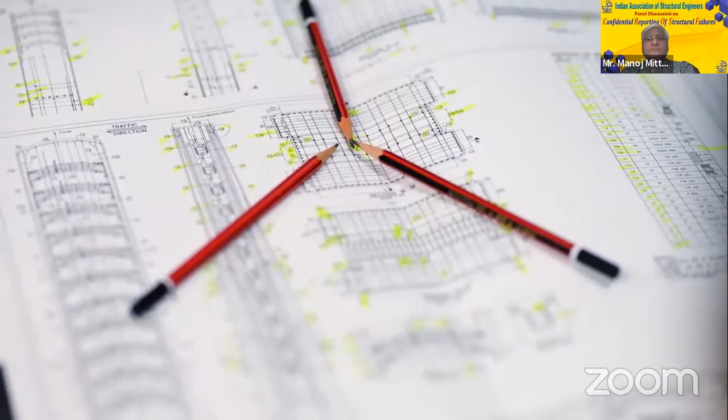The Indian Association of Structural Engineers, also known as IAStructE, was conceptualized and constituted in the year 2002 by a group of senior professional structural engineers from all over the country. IAStructE is registered under the Societies Registration Act 21 of 1860.

IAStructE is a national apex body of structural engineers in India with a mission to promote the structural engineering profession and cater to the professional needs of the structural fraternity.

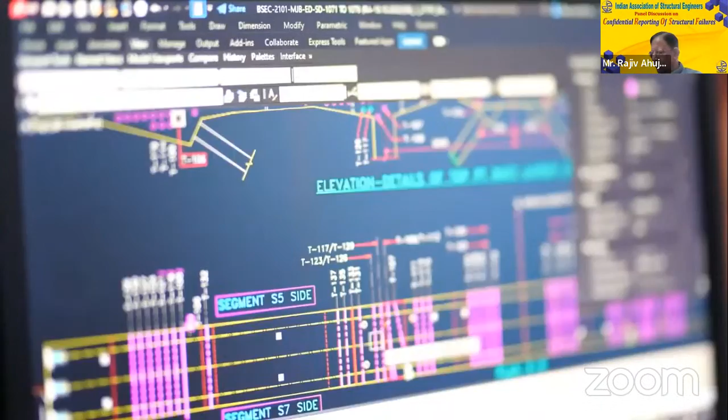In the short span of two decades, the association has attained an eminent position in the professional field. Its membership is valued very highly in the profession.

Since inception, IAStructE has been led by eminent structural engineers like late Shri Mahendra Raj, late Shri Shri Kumar Ghosh, Shri Subhash Chand Mehrotra, Professor Mahesh Tandon, Shri Alok Bhowmick, Shri Manoj Mittal and Professor R. Pradeep Kumar as its president.

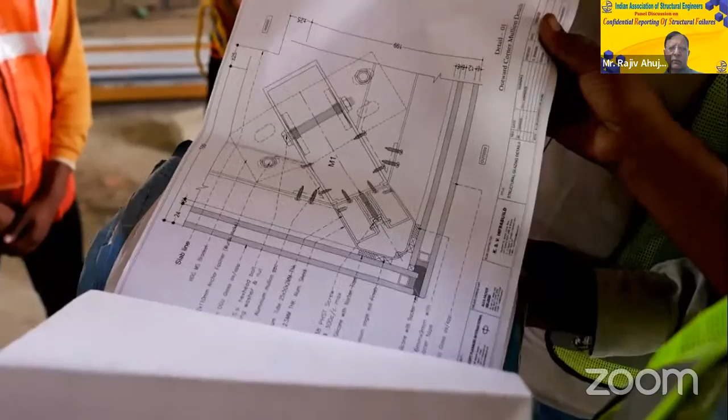IAStructE is a permanent member of the Engineering Council of India and interacts with the government on professional and policy matters related to civil and structural engineers. To expand its reach, IAStructE has collaborations with various international professional like-minded associations and institutions.

IAStructE's prime objective is supporting and protecting the profession of structural engineering by upholding professional standards and acting as a mouthpiece for structural engineers in India.

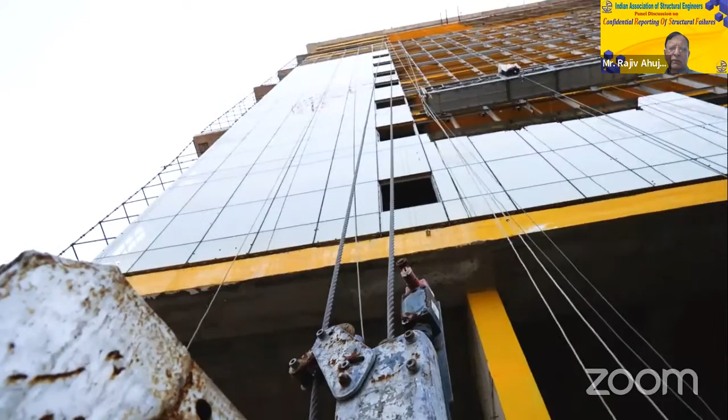IAStructE endeavors to ensure that its members develop the necessary skills in structural engineering and work to the highest standards by maintaining a commitment to professional ethics and standards.

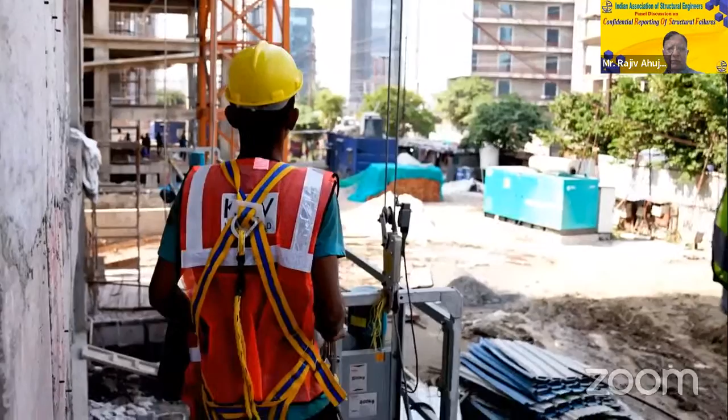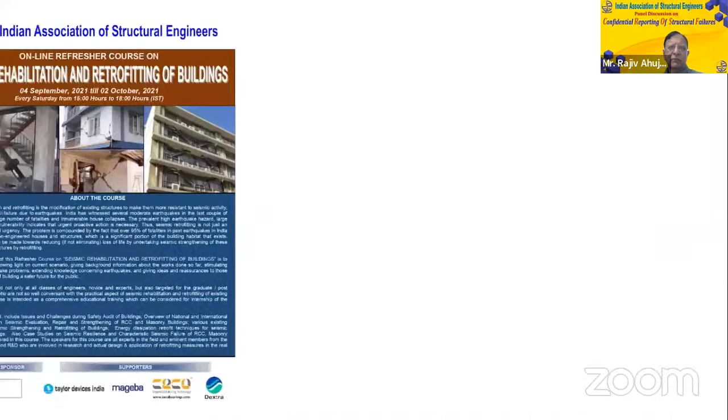IAStructE is actively engaged in organizing several continuing professional development (CPD) courses for structural engineers to help them update their knowledge and advance their career paths. It also conducts refresher courses for young and practicing engineers and student-oriented programs.

Seminars, workshops, conferences, technical lectures and discussions related to the latest technological advancements and case studies are also organized regularly for members to enable them to continuously update their knowledge and skill set by interacting with the best minds from the industry. IAStructE's activities are widely appreciated and known for quality technical content.

IAStructE is also actively engaged in publishing its quarterly journal Structural Engineering Digest (SED), code commentaries, professional guidelines, and a monthly newsletter. IAStructE's publications are becoming popular with time.

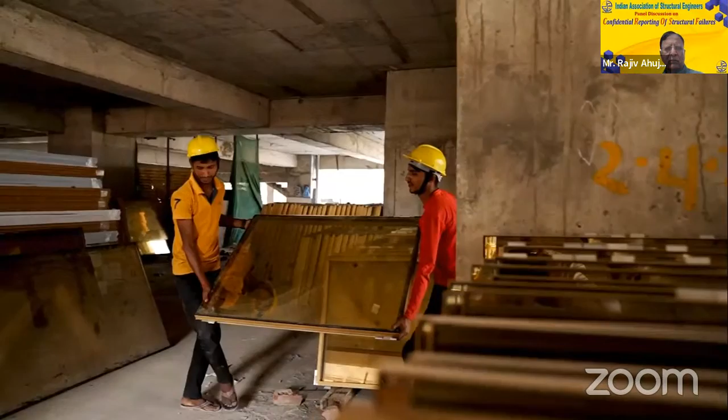IAStructE has representation in various technical committees of BIS and IRC as well. Its members are actively contributing to National Code Formulations.

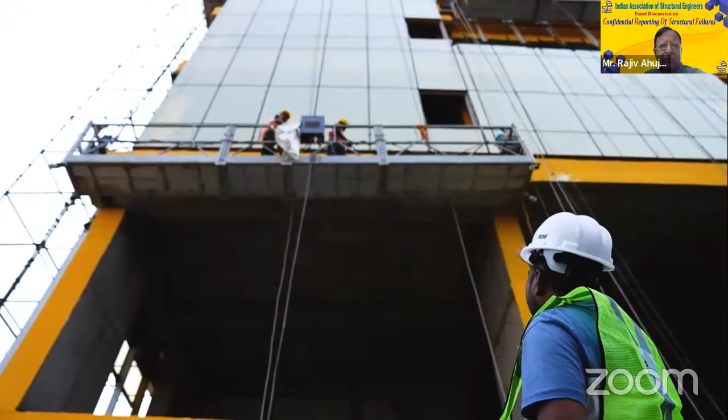In the year 2020, IAStructE started a National Awards competition to stimulate interest in the structural engineering field and to promote innovative thinking and creativity. The awards are presented to winners in recognition of their outstanding contribution to structural engineering, in categories which include Outstanding Structure, Outstanding Structural Engineer, Outstanding Woman Structural Engineer, Promising Young Structural Engineer, and Best Master's Thesis in Structural Engineering.

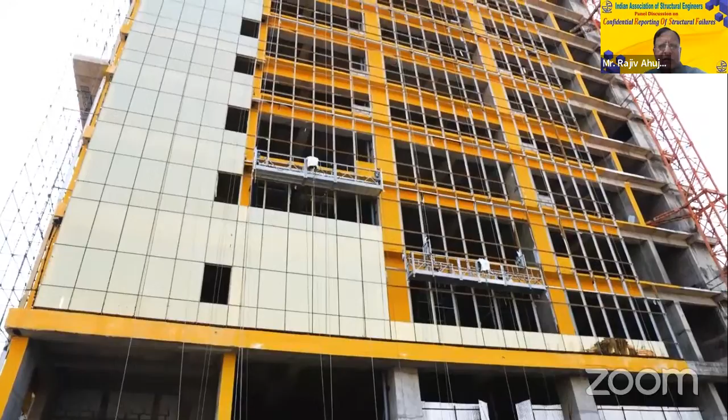IAStructE is currently operating from four regional centers, namely Eastern, Western, Northern, and Southern, having its headquarters in Delhi, to inculcate professional culture and provide handholding to budding engineers.

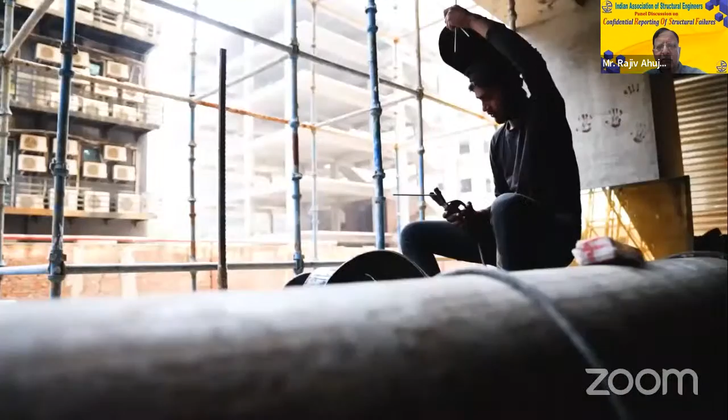IAStructE has its student chapters in several leading engineering institutions as well. Membership of IAStructE is open to all civil and structural engineers engaged in the structural engineering profession.

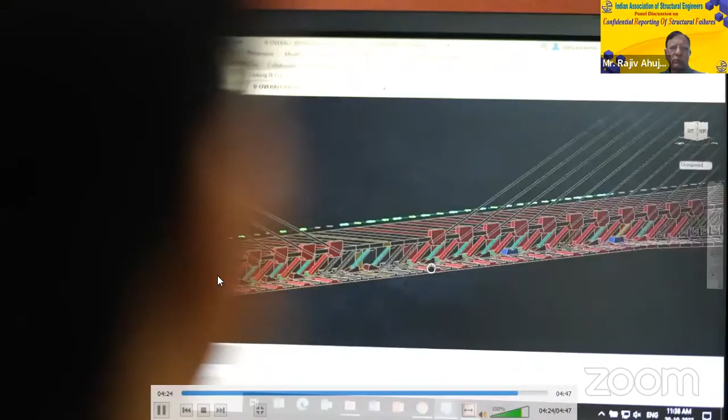Members are elected based on their qualifications and experience in different grades as per eligibility requirements prescribed in the bylaws. Each application is carefully scrutinized before approval.

More information about IAStructE is available on its website, www.iastructe.co.in.

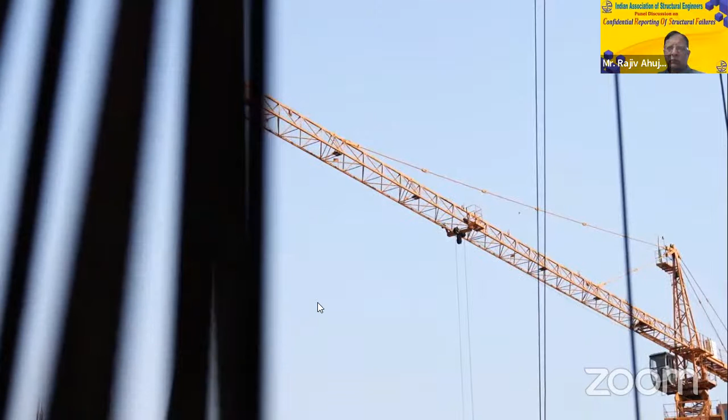Should we start now? Yes. Good morning.

Welcome to this very important webinar on confidential reporting of structural failures, which is a newsletter started by IAStructE some time back.

And the aim today is to know what this newsletter is all about, how we publish it, why we publish it, how you can contribute a report in this newsletter, and how it will be useful to the fraternity and other stakeholders.

So I believe that today I have very eminent speakers who are involved directly with the publication of this newsletter, CROSFALL. I have Alok Bhowmick, who is the chief editor of this newsletter and who initiated it. He is a very well-known bridge structural engineer, and he's also past president of IAStructE.

I also have Professor Mahesh Tandon, who is also an eminent structural engineer and bridge engineer. Everybody knows him. He is also past president of IAStructE.

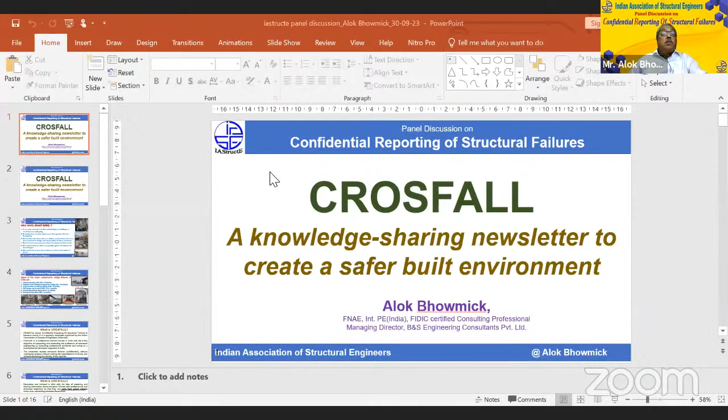Thank you, Manoj. Am I audible? Yes. Is my screen visible? Yes, visible. Okay, I think I have to swap a little bit. You have to go to full screen mode. Just one moment. I don't know how to swap that. You are not able to see that. No, you have to duplicate that. Hello, okay just one moment. I think there is some problem I'm facing. Just give me one minute, I will try to do that. It's okay, but are you seeing two slides or a single slide? No, single slide, it's okay now I think. Oh, you are seeing single slide.

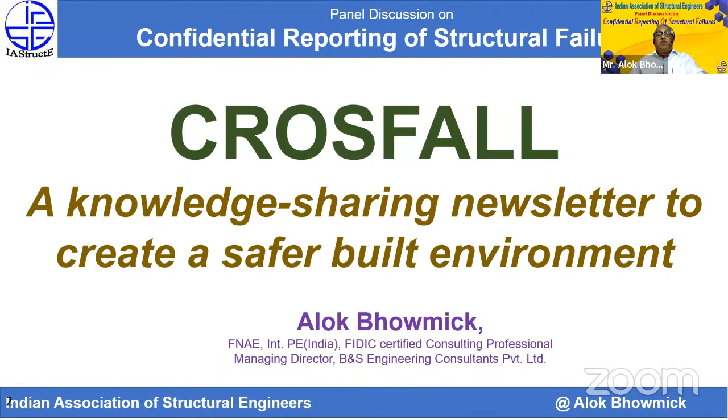Anyway, so first and foremost, let me mention why we started this magazine or newsletter, this quarterly newsletter, which goes by the name of CROSFALL.

We have seen a number of failures in the last decade or so in India particularly, but I think failures are being witnessed all across the world, only the frequency may be different. There is news of damage not only on bridges and buildings, but also due to climate change. We have seen many structures and bridges fail, particularly because of changes in high flood levels.

Now, we need to learn from these failures, but unfortunately the system is such that generally after a failure, we find the investigation reports are not made public, and therefore we really do not learn from past failures. The reasons why they are not made public is debatable, another sort of material for debate, but due to some reason or the other, these are not made public.

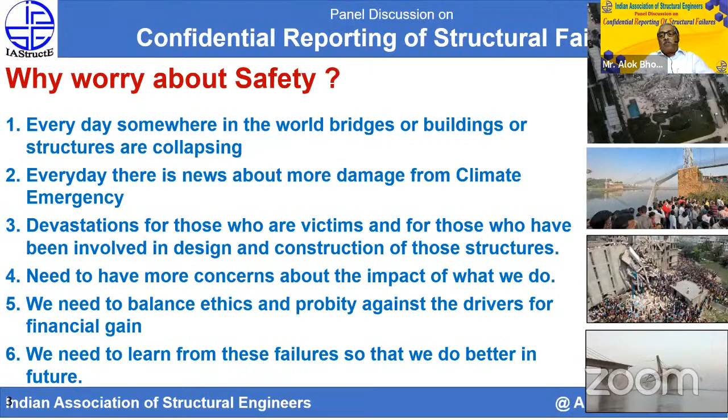Therefore, in line with a similar journal in other parts of the world, like CROSS in the UK, we thought it better to start a newsletter where we publish confidential reports, meaning we do not name the agencies, the stakeholders involved, or the project. We only talk about the failure based on reports gathered from structural and civil engineers. We then have an expert panel go through those reports and give expert comments on what lessons we learned from such failures, and what alert should be given as to what changes are required when someone is designing in future.

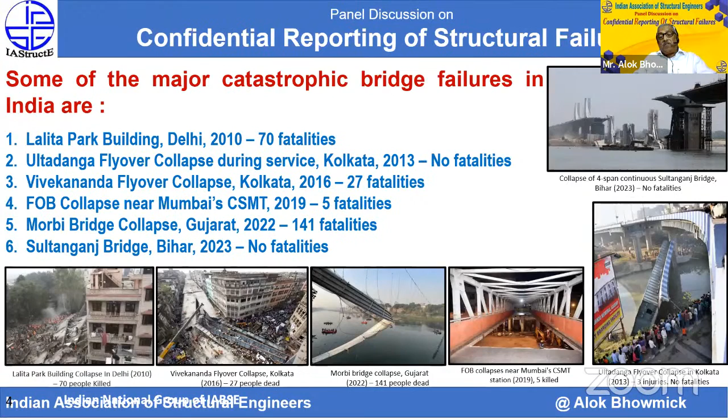Now, these are glimpses of some well-talked-about failures we have witnessed in India, where many fatalities were involved. Recent ones in Sultanganj, Bihar in July 2023, and in 2022 we had the Morbi bridge collapse where 141 people died. All these failures reflect that if we had only taken proper care in terms of detailing, design, inspection, and maintenance, we probably could have avoided such failures.

Now, let me come back to what CROSFALL is. Basically, every letter in this word has a meaning. C is for Confidential Reporting Of Structural Failures And Lessons Learned. I think that, in short, is what CROSFALL means.

It's a quarterly newsletter produced by the Indian Association of Structural Engineers. Most participants are likely well aware of IAStructE, but for those joining for the first time, it is a professional learned society in India with the prime objective of supporting and protecting the profession of structural engineering by upholding professional standards and acting as a mouthpiece of structural engineers in India.

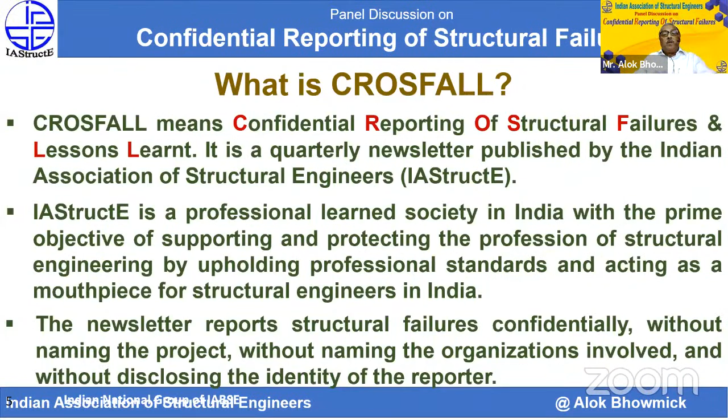Why we initiated this CROSFALL, I mentioned earlier. It was initiated last year. We have completed one year. We have already published 4 newsletters, and the 5th one is going to be published very soon, within a week's time.

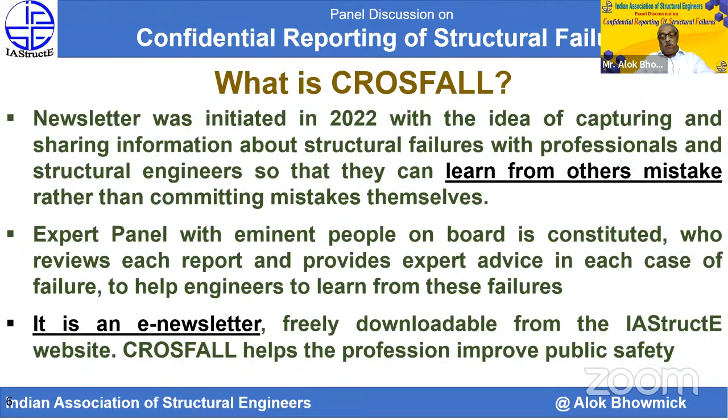I mentioned that it is an e-newsletter which is freely downloadable from the IAStructE website, and it gives not only the failure report but also the expert comments on the failure.

What can be reported? So far we have been getting reports on failures, but we have made it clear in our website that we can report on planning and design stage issues, construction stage issues, operation or occupation or service stage problems related to structural failures or near misses, and even end of life structures and safe disposal or demolition of the structure.

We would also like to cover issues related to computer modeling issues in some projects which has led to erroneous design, even if it doesn't mean a failure. But if somebody wants to highlight certain design practice or analysis practice which is wrongly done in some projects, that can be done, and we can highlight that.

We can also highlight seismic safety and fire safety issues and competence issues in design and construction. These are our aims and objectives.

But so far, in the last 4 newsletters, we have published 15 reports, and what we find is that we are not getting reports as we expected. We would, through this webinar, appeal to all participants to seriously consider reporting failures when they experience it, in a confidential manner.

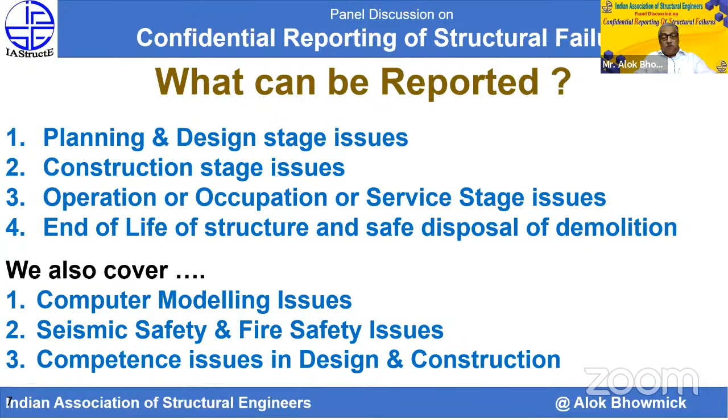So that their names, the name of the stakeholders, will not be published. Source of inspiration for CROSFALL, I mentioned, is CROSS from UK. But actually, prior to even CROSS UK, there is a NASA confidential close call reporting system, which was initiated for the aviation industry, and which was also followed by CROSS UK.

When we say CROSS, it is basically a joint effort of 3 very reputed and very old organizations: IStructE UK, which has more than 30,000 members; then the Institution of Civil Engineers, which is more than 200 years old and perhaps the oldest association in the world; and the HSE, which is the Health and Safety Executive in UK.

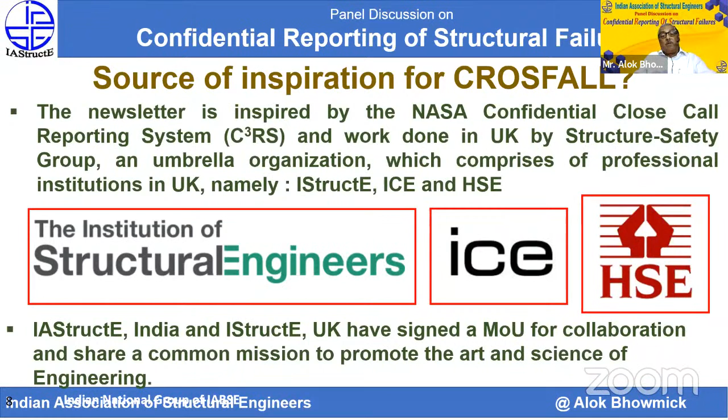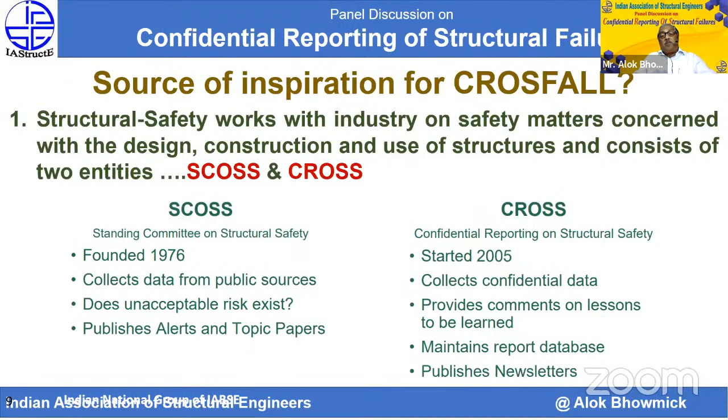They produce 2 documents - there are 2 agencies involved. One is SCOSS, which is the Standing Committee on Structural Safety, and CROSS, which gives the confidential reporting. SCOSS is basically a committee which gives alerts to the government based on the reports published in CROSS. We have taken inspiration from these documents, and we thought a parallel document should be provided.

In short, what are the benefits of confidential reporting? It promotes cultural change in the profession. Designers who may not be aware of what precautions to take while designing can go through these reports and understand that a similar bridge or building had this problem and collapsed. Then probably they will take care while designing.

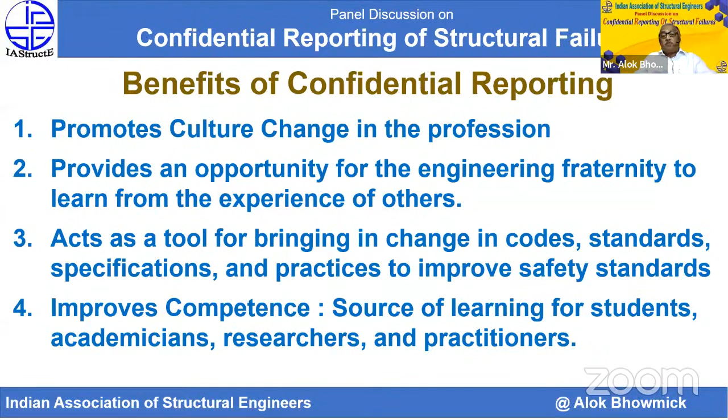And the same applies in construction. It provides an opportunity for the engineering fraternity to learn from others' experience. It acts as a tool for bringing changes in codes, standards, and specifications. And it helps improve the competence level - a source of learning not only for practicing engineers, but also for students, academicians, and researchers.

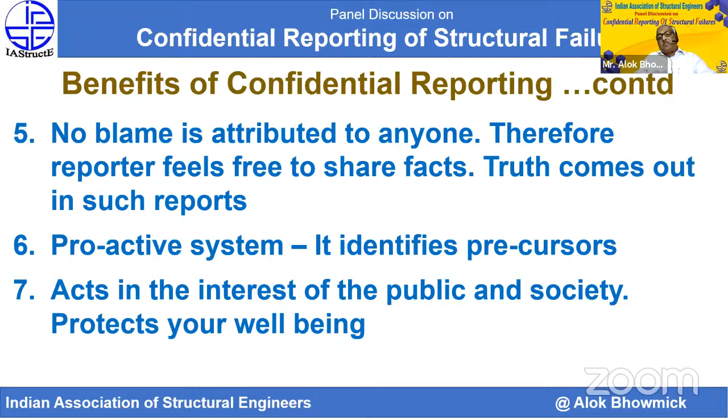No blame is attributed to anyone. Therefore, the reporter feels free to share the facts. Truth comes out in such reports. It's a proactive system - it identifies a precursor, and it acts in the interest of public and society, and protects our well-being.

The operating system of CROSFALL internally is that anybody can submit a report. A report is submitted to an email ID which is given, and that is only accessed by the chief editor, that is myself.

I go through the report, and the first thing done is declassify the report, which means even if the reporter by mistake puts somebody's name or some project's name, that is identified and removed. This declassified report, which does not contain any organization's name, individual's name or project's name, is then circulated to the editorial board. We have an elite panel of editorial board members, and they finally go through the report.

If certain things are missing, that is pointed out, and through the chief editorial board, there is an interaction with the original reporter. Once that report is finalized by the editorial board, it goes to an expert panel.

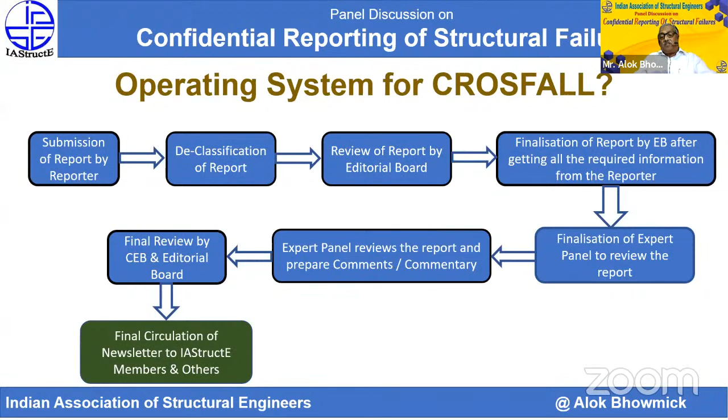The expert panel is fixed by the editorial board based on the nature of the project reported. If it is a building, we go for experts in that particular field, like buildings or bridges. Once we receive the expert panel review report, the finalization of that report is made, and we compile it and circulate the newsletter through our website and mailing list. This is the process, and a lot of confidentiality is maintained while doing this.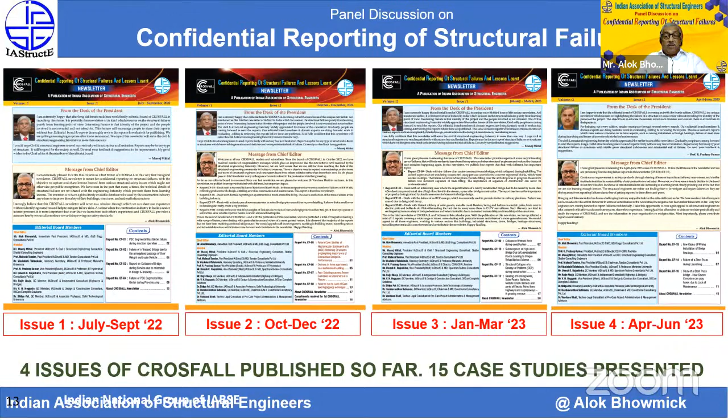These are the 4 reports which so far we have published. The first issue started in July to September 2022, published in October last year, and then the last issue is June 2023, published in the first week of July. The next issue is going to come in the first week of October.

These are the various newsletters - you see the first 3 newsletters had 4 case studies reported each, and the last one has 3 case studies reported. The one coming in October will have 3 reports. So altogether, so far we have published 15, and 3 more will come in the next issue.

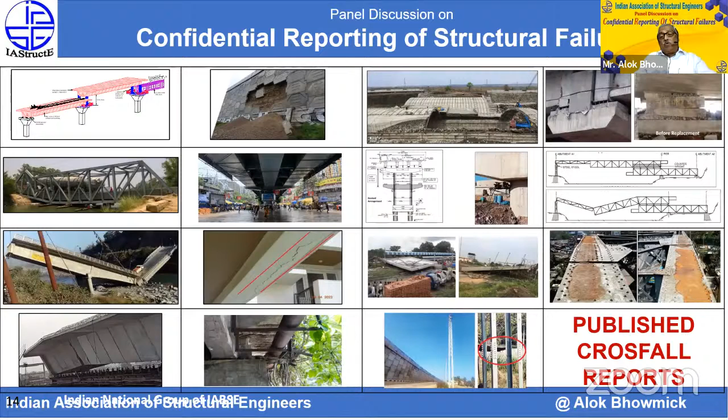To conclude, I would say that in light of the recent spate of infrastructure failures, professional associations should be active in promoting newsletters like CROSS, which is published in the UK and many other parts of the world, or CROSFALL, which is published in India, and the like, and help to reassure society at large that infrastructure is safe.

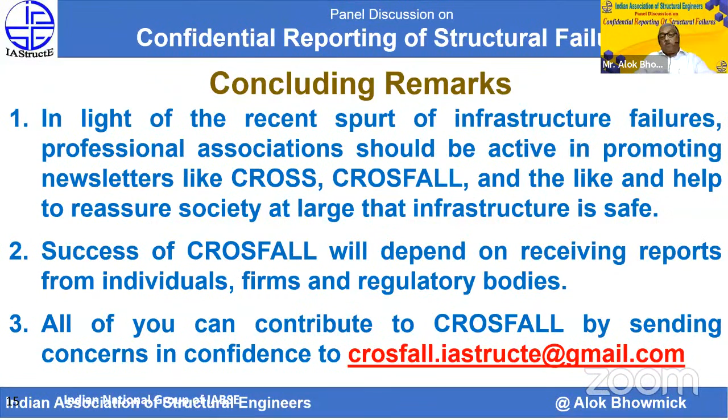Success of this newsletter will depend a lot on receiving reports from individuals, firms, and regulatory bodies. All of you can contribute to CROSFALL by sending concerns in confidence to crossfall.iestruct@gmail.com. Thank you very much.

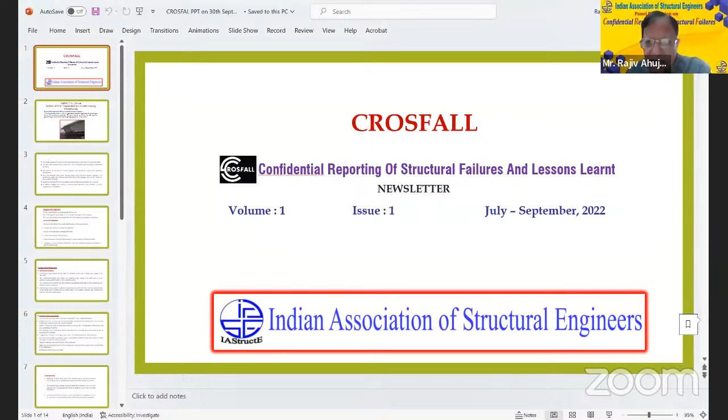So I am presenting one article from the very first volume, that is July-September issue 1, volume 1. So this is how it looks like. This is regarding failure of a PSC segmental box girder during stressing.

Of late, in the last couple of years, we have seen several such failures, whether in segmental construction when you do the stressing, the segment gets crushed at some location, or it collapses, and the reasons may be common to all such failures.

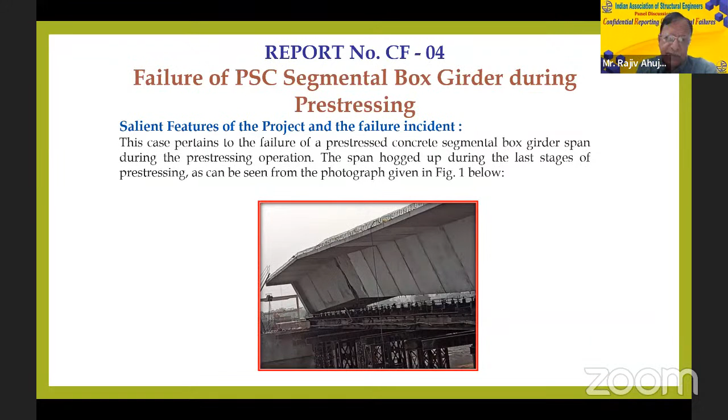So this is about a span which is about 60 meters long, done by segmental construction over a river bridge. All the segments are precast, and these are supported on ground supported supports. It was a simply supported case, 60 meter span over a river bridge with an overall width of 12.5 meters. The erection of precast concrete segments was carried out using trestle supported arrangements.

As you know, after the segments were joined through epoxy gluing, which is a normal procedure between adjacent segments, the stressing cables are stressed as per the drawing, either from one end or from both ends. During the stressing of the last 2 cables, cracks developed on one blister of a segment.

There were blister blocks for intermediate curtailment of the segment, and cracks developed in one of the blisters. In addition, hogging and crushing of concrete were observed at the interface of certain segments close to the midspan.

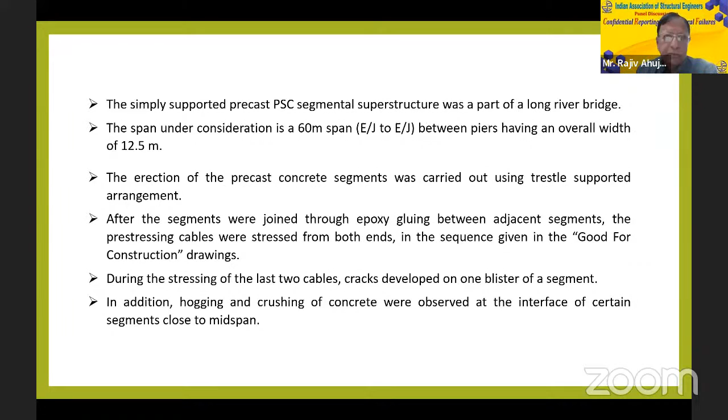So what was done to start with: the superstructure was totally de-stressed. All the segments were taken out from the span and the segments were shifted to the casting yard. Then it was decided to investigate the cause of cracking and crushing by a third party.

A third party was engaged, and issues investigated by the third party are: review and checking of the design and drawings of the superstructure, which we normally always do; patterns and causes of cracking in the segments; quality and strength checks including NDT tests; cause of bursting of blister blocks; and cause of concrete crushing at the junction of segments during the stressing operation.

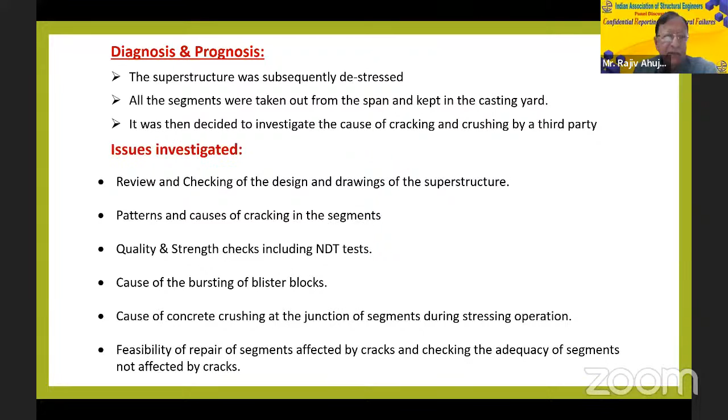Feasibility of repair of segments affected by the cracks, and checking the adequacy of segments not affected by cracks, whether we can use these segments again after repair, and whether the existing segments are crack-free without any problem. So that was also one of the issues investigated.

The result of investigations showed deficiency in design. The construction stage analysis was not done for checking stresses due to lifting and stacking of the segment. Normally, one segment is stacked over the lower segment, but it's very important to see whether this does not cause any undue stresses or cracking in the slab or cantilever slab. Supports have to be organized properly.

The isolated intermediate soffit blisters are anchored in the middle of the soffit and not at the junction of the web and soffit, which is not a desirable practice. Normally, we provide the blister at the junction of web and soffit, but in this case it was provided right in the middle of the soffit slab.

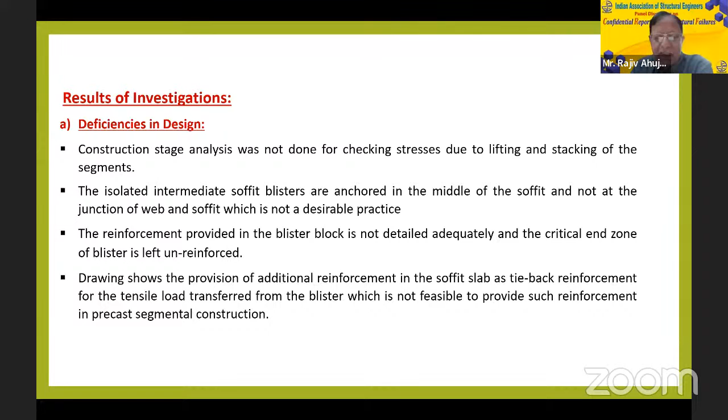The reinforcement provided in the blister block is not detailed adequately, and the critical end zone of the blister is left unreinforced. The drawing shows provision of additional reinforcement in the soffit slab as tie-back reinforcement for the tensile load transferred from the blister, which is not feasible to provide in precast segmental construction. Normally, we provide tensile reinforcement at the bottom of the blister to transfer the tensile forces beyond the blister block, but in precast segmental construction that may not be feasible. Still, the drawing showed such kind of detailing.

Then the concrete quality and strength: concrete cube tests were found acceptable as per codal specification. However, NDT tests such as core testing and rebound hammer test established that actual concrete strength was far below the design strength. This is a very, very important point—we are normally satisfied with the cube test results, but the actual concrete core may be quite deficient and may not meet the quality standards.

Failure of the anchorage cone in the intermediate blister occurred due to inadequate reinforcement and poor compaction of concrete. The anchorage cone at the blister had an edge distance less than the prescribed value as per the manufacturer's catalog.

Longitudinal, transverse, star-shaped and scattered cracks were observed at several locations in the soffit slab, web, and deck slab. The cracks measured by a specialized agency were reported with width varying from 0.1 mm to 0.3 mm and depth varying from 30 mm to 100 mm.

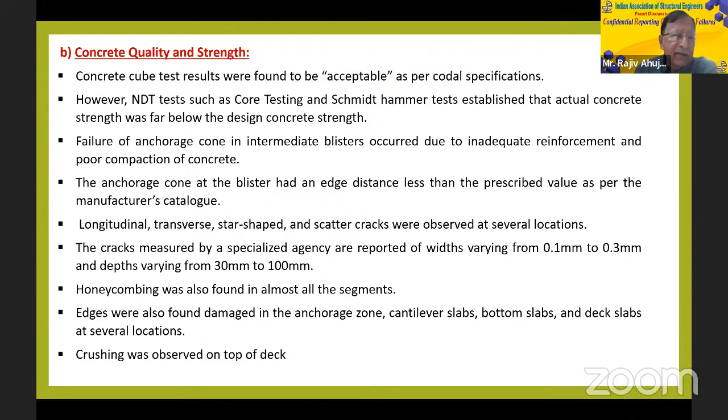Honeycombing was also observed in almost all the segments. Edges were found damaged at the anchorage zone, cantilever slab, bottom slab, and deck slab at several locations, maybe due to inadequate handling of the segments. Crushing was also observed in the concrete.

In terms of workmanship, application of epoxy in the joints of the segments was not carried out properly, and the epoxy resin applied had set even before joining of the segments. The hardened epoxy is likely to prevent 100% contact between the match-cast segments, thereby increasing stresses at the location where contact is established.

Now, this is a very common problem, especially in very, very wide decks. Today, decks are 25 to 30 meters, even more than that. So it is very important to ensure 100% contact of the adjacent segments.

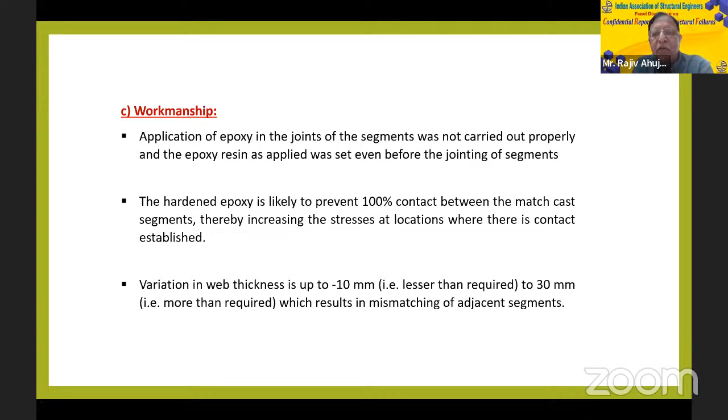Variation in web thickness is up to -10 mm, that is lesser than required, to 30 mm, that is more than required, which results in mismatching of adjacent segments. Reinforcement was found exposed at a few locations. Shear keys of the segments were also found damaged at some locations.

Existing concrete cover in various segments has been carbonated up to 70% of design cover in a very short period of about 2 years, which means the concrete is permeable, and in just 2 years carbonation has taken place up to 70% of the design cover.

This shows that concrete is porous and honeycombed with high probability of corrosion in steel reinforcement in the near future, which will induce spalling, cracking, etc.

Water absorption results reveal that it is in the range of 2.53% to 5.15%, which is beyond the maximum limit of 3% as per IS 516. The results reveal poor quality of concrete and higher permeability.

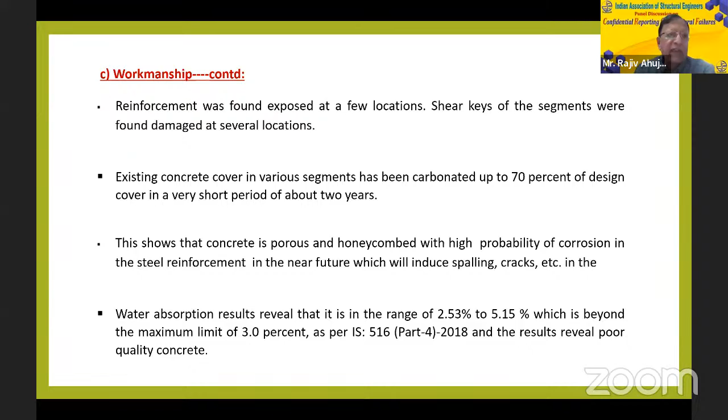The conclusion drawn was that the failure was because of a variety of reasons, but the main reasons are poor quality of concrete, low concrete strength, pervious concrete, cracking and honeycombing, bad workmanship, reinforcement congestion, improper gluing of segments, and improper reinforcement detailing in the blister block.

The quality of coarse aggregate and fine aggregate was not up to the required specification. Because of these reasons, all the precast segments were rejected. Later, the source of aggregates was changed, and quality and workmanship standards were improved for the new segments, which were erected without any problem during the prestressing operation.

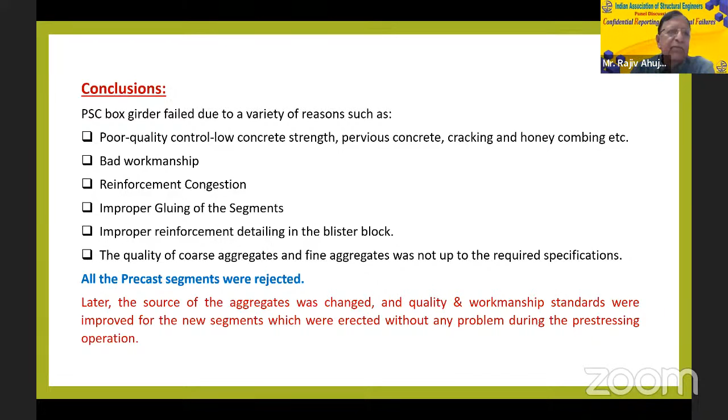There are many lessons to be learned from this failure. Adequacy and acceptance of cube test results alone do not ensure good quality concrete and design strength. Apart from strength, it's very important to ensure quality of concrete in terms of durability criteria, which are also given in our IRC codes, to ensure proper cover, reinforcement placement, and thickness of the various components.

Curing is a major factor in achieving the desired concrete strength, which should be ensured. In this particular case, I think curing was also deficient.

Quality control at the site should be ensured by a competent, knowledgeable quality control engineer. There should be a separate senior quality control engineer in each organization who should supervise and ensure quality control. Regular supervision should also be done by the head office of the contractor, and a proper record should be maintained of all the quality control checks.

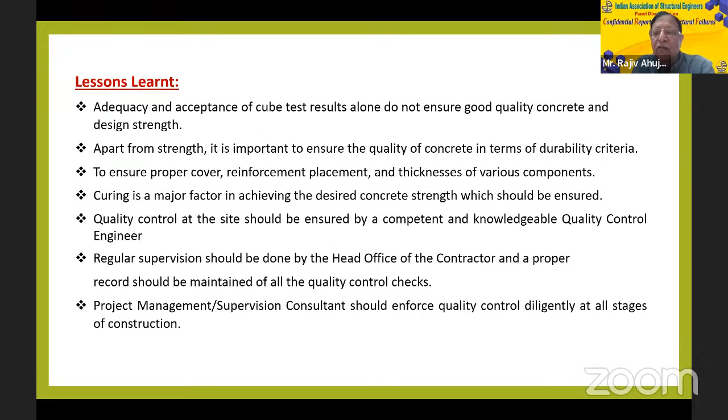It should not be the sole responsibility of the contractor. The project management, supervision consultant, authority engineer, independent engineer — they should also enforce quality control diligently at all stages of construction rather than leaving it to the contractor alone.

The designer should develop detailed drawings properly, especially where there is reinforcement congestion, and increase concrete dimensions suitably to provide proper space for concrete to go in. Thickness specified in design codes are minimum, and the designer should increase these at points of reinforcement and cable congestion.

Self-compacting concrete or high-performance concrete should be preferred in highly reinforced sections. Overstressing of pre-stressing cables and extra elongation more than the value specified in drawing should be avoided. Pre-stress force more than the design value is detrimental to the structure. Workmanship should be improved by imparting training to the skilled manpower who work at site.

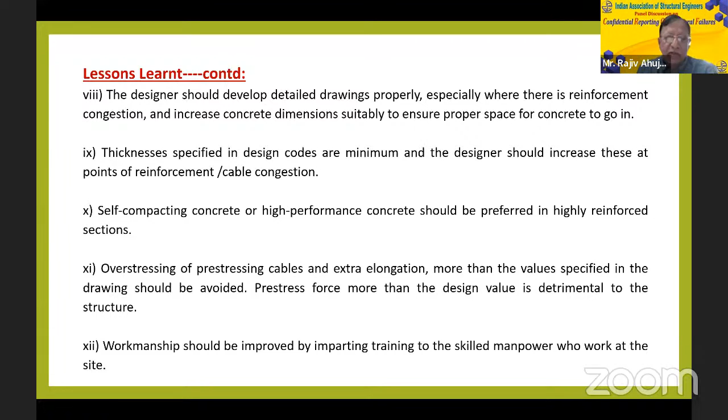The matter was referred to an expert panel, and these are their comments. Several similar failures have occurred in recent times, which is alarming. The main reasons for such failures are poor quality of concreting, honeycombing, lack of proper curing, damaged shear key, congestion of reinforcement and prestressing cable, and improper gluing and matching of segments.

Quality of concrete suffers also due to heavy congestion of reinforcement and prestressing cables. It's becoming a common practice to support large spans with wide decks on a single superstructure comprising two webs. This causes concentration of design forces and requires heavy reinforcement and cables, resulting in heavy congestion.

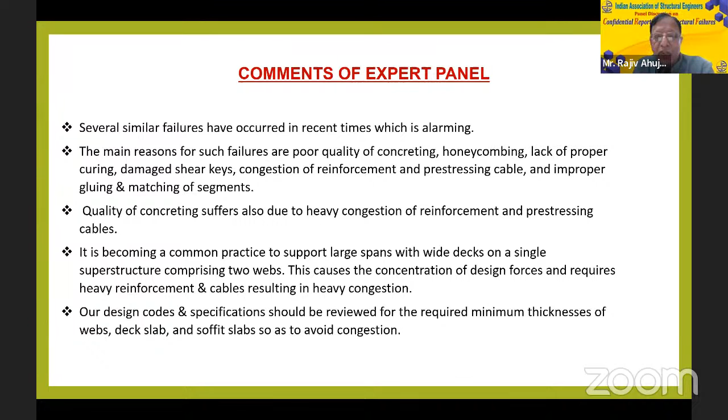Our design codes and specifications should be reviewed for the required minimum thickness of webs, deck slab, and soffit slab so as to avoid congestion. The designer too should increase the concrete dimension at locations of reinforcement congestion rather than provide the minimum thicknesses prescribed in the code. The codes too should address the problem and caution designers to be careful about congestion of reinforcement. Maybe there should be a separate chapter on congestion of reinforcement and how to deal with it.

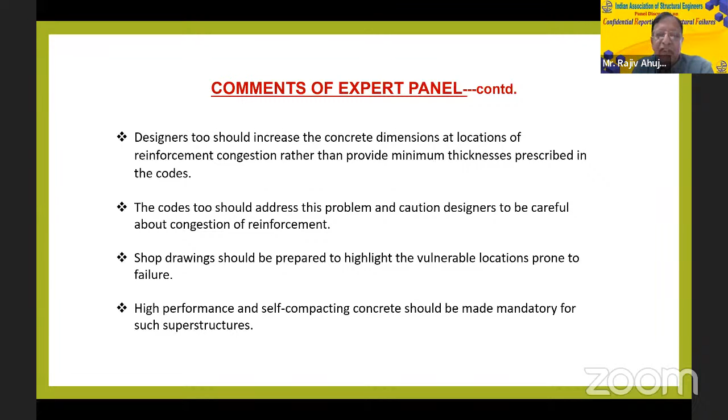Shop drawings should be prepared to highlight the vulnerable locations prone to failure. High performance and self-compacting concrete should be made mandatory for such superstructures.

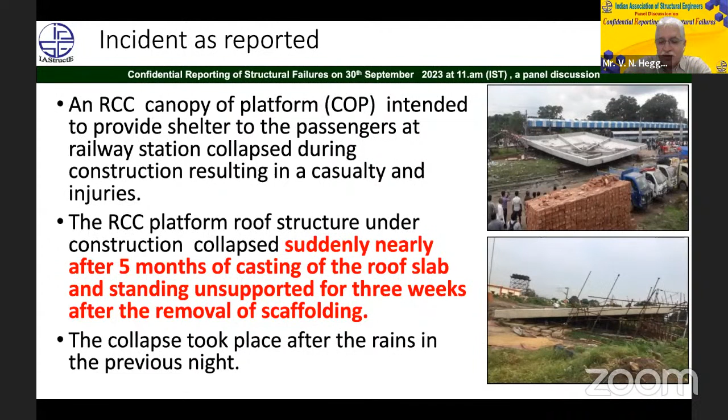This particular platform was conceptualized on the basis of the existing platform, which was constructed almost 25 years back. This platform was an extension of the existing railway platform, which was to be extended.

So the existing platform designs and drawings were supplied to the designer, who was told that to maintain uniformity, a similar kind of canopy had to be designed and executed. During investigation, as per the report, it was found that during construction of the existing platform almost 25 years back, a mishap had taken place, and there was an unwritten understanding among the policymakers not to adopt this kind of platform in the future.

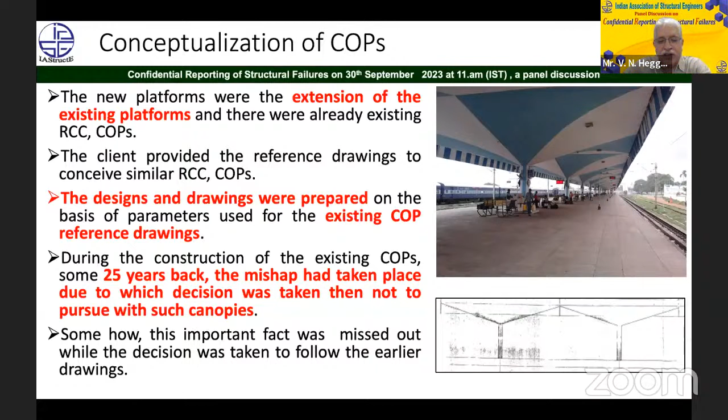But somehow, during the proposition of this particular platform, during the design, this fact was omitted, or it was not noticed. We just need to understand the structure of the canopy of the platform which was proposed.

You can see here it has an inverted pyramid shaped RCC canopy. This dimension may not actually be reported - normally in confidential reporting, we may not reflect or give the actual dimensions which exist in reality. It may be different for obvious reasons. So tentatively, the diameter of the inverted canopy was around 18 meters.

That's quite huge. It was supported on a circular column of 750 mm diameter, and it was almost 4.5 meters tall. Within that 750 mm dia column, there was a drainage pipe going inside it, as you can see. The existing canopy of the platform had a cellular sort of inverted pyramid.

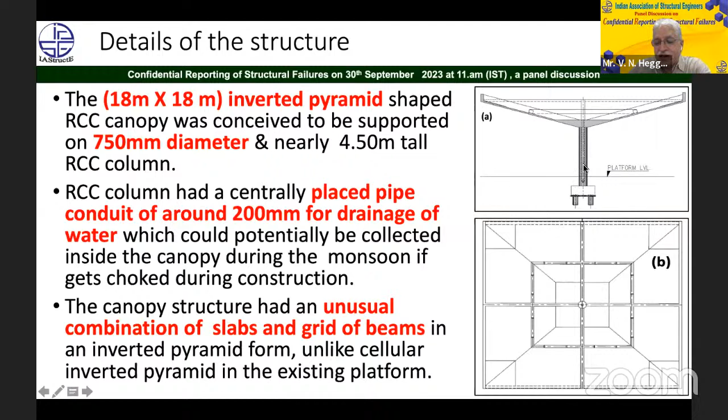But the proposed one had a very unusual combination of slabs as well as grid beams, as you can see here. The slab was in an inverted T-beam arrangement. You can see the combination of the grid beams and the slab, which is connected to the slab concentrically, supported on a column which has a drainage pipe of around 200 mm.

This drainage pipe, at around 375 mm from the top of the pile cap, was bending outwards, as you can see here - the drainage pipe bent at around 375 millimeters on top of the pile cap.

Obviously at this location, if you look at the cross section, it is reduced to a large extent, and the properties are reduced to a large extent. This vertical axis becomes a weaker plane, basically the weaker axis, because of the reduction of concrete due to the bent drainage pipe, as you can see here.

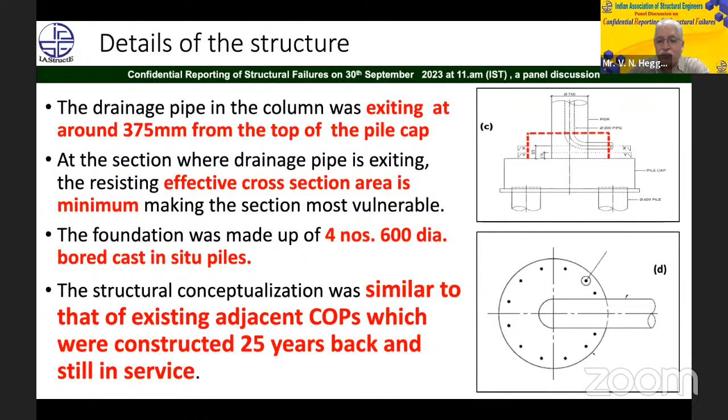This canopy of the platform was supported on 4 numbers of 600 mm dia bored cast-in-situ piles, as you can see here.

Just for comparison of the existing one, which has been serving for the last 25 years, and the proposed canopy of the platform - if you look at it, for the same dimension, the earlier one had M20 grade concrete, whereas the proposed one had M35 grade concrete.

The grade of steel used 25 years back was Fe415, whereas obviously the grade of steel used in recent years is Fe500. The percentage of steel, maybe because of the difference in grade, was higher earlier - almost around 1.38%, whereas 0.6% steel was there in the new one, as you can see here.

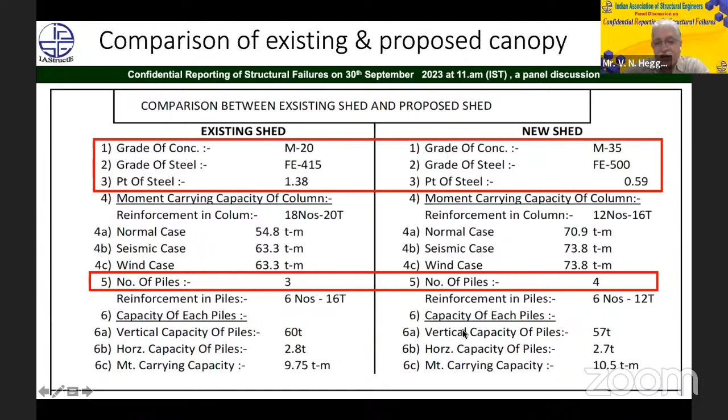With respect to the number of piles, for the same load cases, around 4 numbers of 600 mm dia piles were used in the proposed canopy, whereas the existing one had only 3 piles of 600 mm dia, with a capacity of around 60 tons. We saw 57 ton capacity piles for the new one.

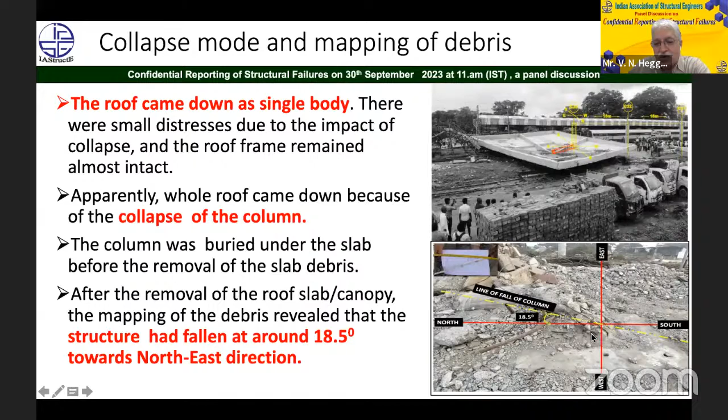This was studied, and it was observed that the columns had broken in two locations: the first failure at 175 millimeters above the pile cap, and the second failure was around 900 millimeters above the pile cap, as you can see here.

This measurement was done, and it was also observed that the pile cap had, in the north-east direction, settled by 4 -- I think it may not be settled, it could even be casting imperfections. We can say 4 is expected to have occurred. That means there was no settlement of the piles that had taken place. If you really look at it, that's how it was done.

Also, the reinforcement -- these days also I'm observing in many cases, wherever the failures are taking place, somehow the bonding between the concrete and the reinforcement is not that good. You can see here, that's what it looks like. Though there is a slurry of concrete smeared on the surface of the reinforcement, and somewhere a piece of concrete is attached, it seems to have come out rather cleanly.

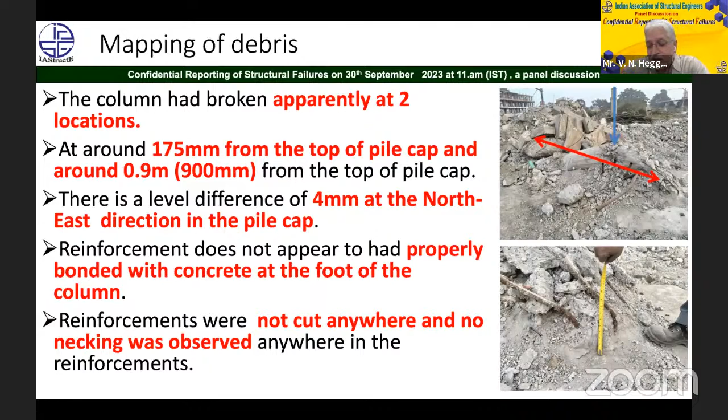The concrete seems to have come out rather cleanly, but there was no necking of the reinforcement. That means the reinforcement had not yielded anywhere. It looked like obviously a concrete failure, because the reinforcement had not necked, and there was no reason for us to suspect failure in the reinforcement.

At the time of the collapse, the full dead load was there, and there was no live load on the roof. Earthquake was obviously not there, and the wind speed was very negligible, around 4 meters per second. But it's important to note that the previous night there was rain, and it had followed the next day.

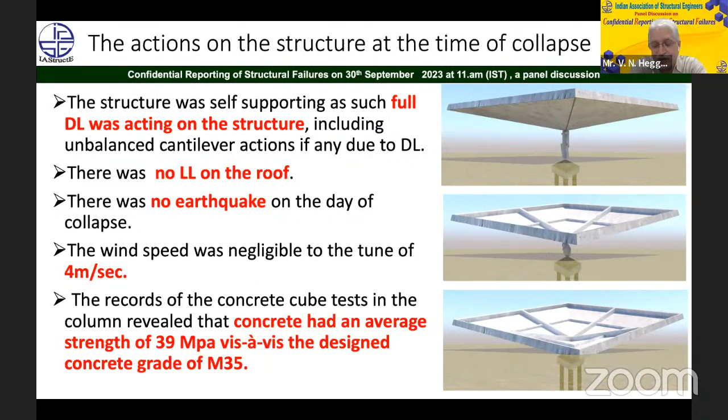And the grade of the concrete -- if you really look at it, even the core testing was done on the fallen columns, and the earlier cube test results were also tabulated and compared. The grade of concrete was quite good. Though the design was done for M35 grade concrete, on average the strength of the concrete was coming around 39 MPa to 40 MPa, as you can see here.

For this condition, at the time of the collapse, when the analysis was done, there are two sections which are critical: where the failure has taken place at around 175 millimeters above the pile cap, that is a solid section as you can see here, and also at 375 millimeters at the top of the pile cap, where the section due to the bent drainage pipe is reduced to a large extent.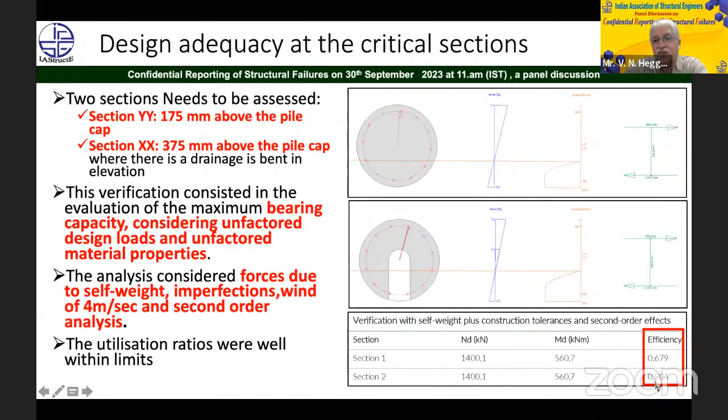Now let us have a look at it. If you really analyze the failure here, the failure should have occurred perpendicular to the weakest axis of the weakest plane. As you can see here, this is the weakest plane. The failure's line of fall should have been in this direction, perfectly to the north direction.

But the line of fall was around 18.5 degrees from that. Also, the failure had not happened at 375 millimeters above the top, where the bent drainage pipeline is. Failure had taken place at around 175 millimeters from the top of the pile cap, which is a comparatively stronger section than the section at 375mm at the top, the XX, as you can see here.

There are two indicators here: the 18.5 degree line of fall, and also the fact that failure took place at the comparatively stronger section. So obviously, unless there is a deviation in geometry during construction in the north direction - the column being out of plumb in the north direction, or the roof being cast eccentrically in the north direction inducing a large moment, or weak concrete in the north direction...

...and also unless there is insufficient reinforcement. There was at around 0.9 meter from the top a construction joint. When you provide a construction joint, reinforcement is provided but there's no overlapping of the reinforcement - there will be a development length of the reinforcement. If there is not sufficient development length, that also could cause the failure at the construction joint, because the development length is not there. So unless these sort of deviations are there, the failure would not have taken place.

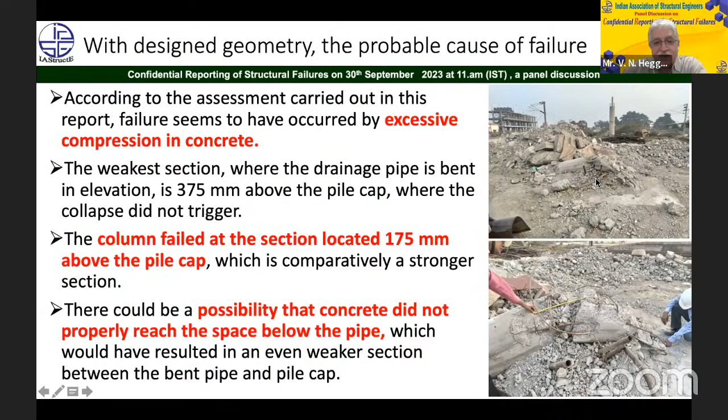There are so many other probable causes of the failure also - inability to maintain the verticality of the column, and inability to construct the roof concentrically. Just imagine a 750mm column and the huge inverted pyramid of 18 by 18 - it may not be possible to construct without casting imperfections. There is a possibility of out-of-verticality of the column, the column being out of plumb, and also the roof could have been cast not symmetrically, eccentrically.

That possibility is there. And also, I told you that the inverted pyramid might have got filled up with water because of the previous day's rain. That's also possible - a huge water accumulation. For any reason, if the drainage pipe is choked during construction, there's a possibility of all the water being collected on the inverted pyramid. That, clubbed with the non-verticality of the column or the eccentricity of the roof not being cast properly, could multiply the moments on the column.

That possibility is there. And also, at the location of the drainage pipe, the pipe is bent, which makes the section very weak. Though the line of fall is 18.5 degrees, it could have happened for a variety of reasons. The section properties could have been reduced to a large extent due to the bent drainage pipe there, and of course the concrete underneath the pipe might not have had good integrity.

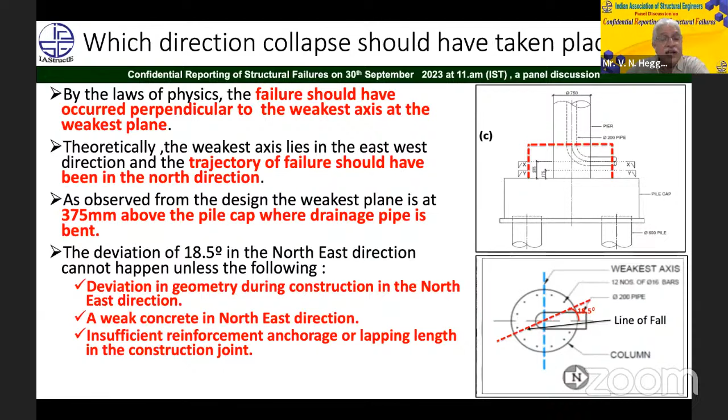But unfortunately, in the proposed canopy, this pedestal was missing as per the report. And also, the structures are sensitive to wind load suction. I think that's very, very important.

For shapes like this inverted pyramid, the code doesn't give proper guidelines on how to consider wind load suction—meaning one side has upward wind load while the other side has no wind. Because of that, the overturning moment taking place in the column is not very clear in the codes. Perhaps this has to be considered on the conservative side.

I think we'll have to take a call. It's the discretionary call of the engineer. He should take that into consideration.

Finally, I think the most important lesson learned is that railway platforms, being a public place, are always crowded with people. This type of canopy of platform is totally unredundant. There is no redundancy at all in this particular canopy structure. If you really look at it, there is only a column. The load path is singular, and the construction has to be very, very precise.

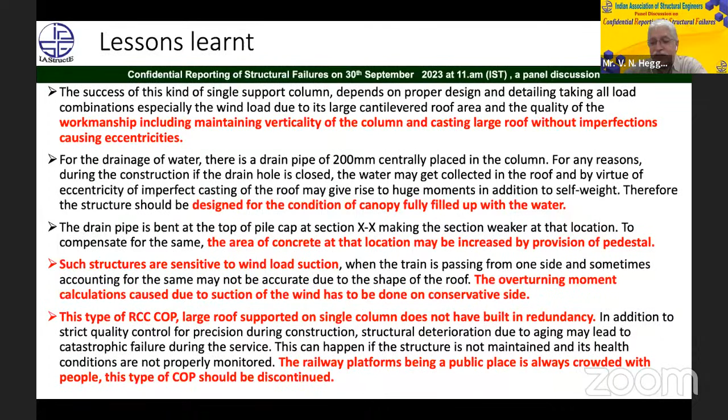So perhaps the structure is not that robust. It doesn't have the alternative redundant load path as a redundancy. So perhaps it may be a good idea to discontinue with this kind of RCC canopy of platform, in my opinion. This is the lesson learned, and now we can understand that this kind of report coming in the CROSS can help the engineering fraternity to really save our world for posterity, and also to check the accidents which can take place.